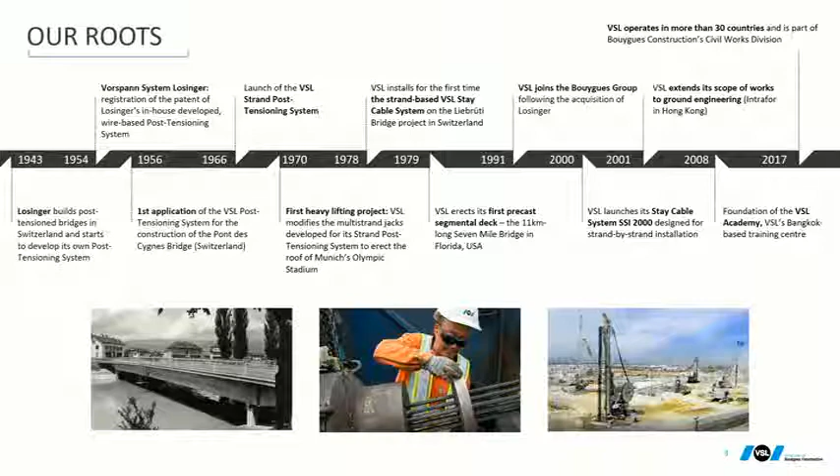A bit of history. VSL has been built as a spin-off from Losinger. Losinger is a Swiss company, known worldwide at that time for construction. VSL, meaning Vorspann System Losinger, has been created around a patent of how to anchor wires to an anchor head and transfer this force to a piece of concrete, basically. We call it post-tensioning, eventually.

VSL has been developing the wedge for this 7-wire strand. And from this concept, has developed post-tensioning, stay cable, heavy lifting, and other applications making use of strand and anchor head.

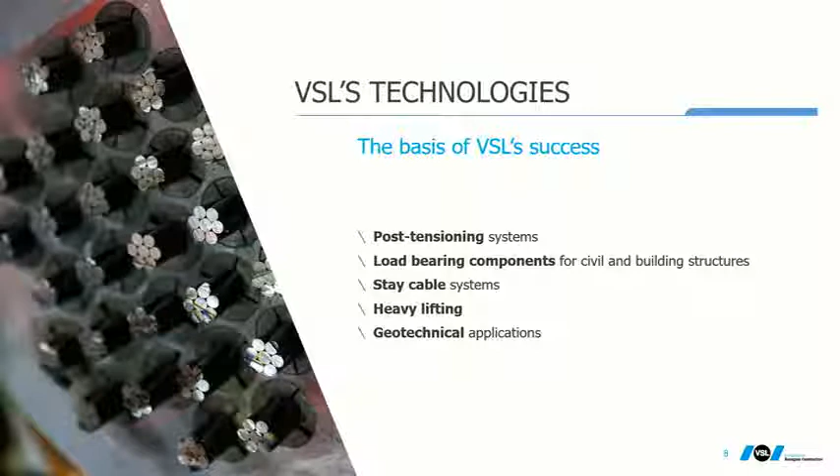Bridge construction, something we have been aware of here in this region; we have been quite active there. Foundation, diaphragm walls -- I'll go quickly on all this. Can you tell me if you need more detail on some of these aspects?

Containment structures, and of course, last but not least, repair and retrofit, which is the new challenge of tomorrow: maintaining a huge park of existing structures.

And this over the past 60 years. Many references in many different fields, and a lot of them about bridge construction.

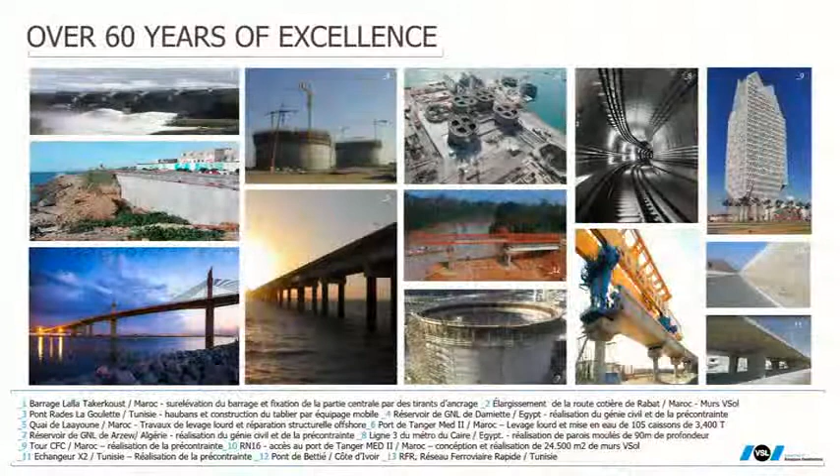So let's now enter into the heart of the topic: stay cable. And just a bit again of history about stay cable. First stay cable bridge, 1978, and since then we have kept developing, eventually with various solutions till now.

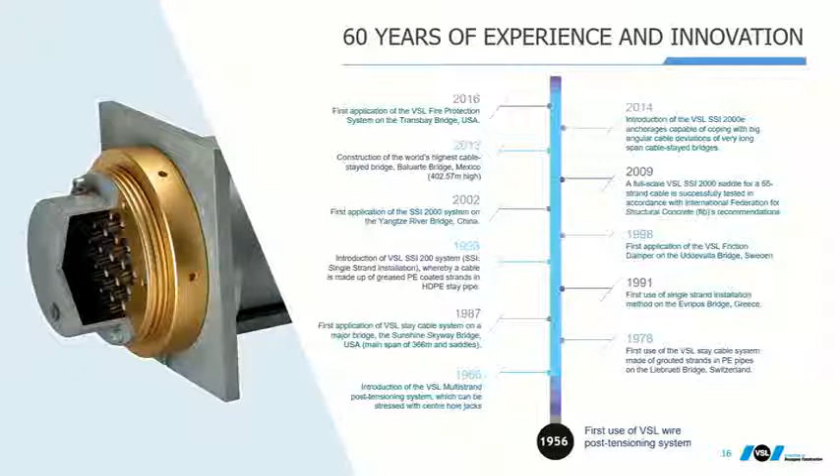So here we are. In terms of stay cable, we're going to look at it from the point of view of components, for the beginning. Stay cable -- everyone knows what it is. It's a cable structure transferring force from one point to the other.

Today, in the perspective of a new recommendation and new code, it's seen as a family of 5 families of components. The first one is the tensile element, the strand, which transfers the load from one point to the other. Second, the anchorage, transferring the force from this one strand to the structure.

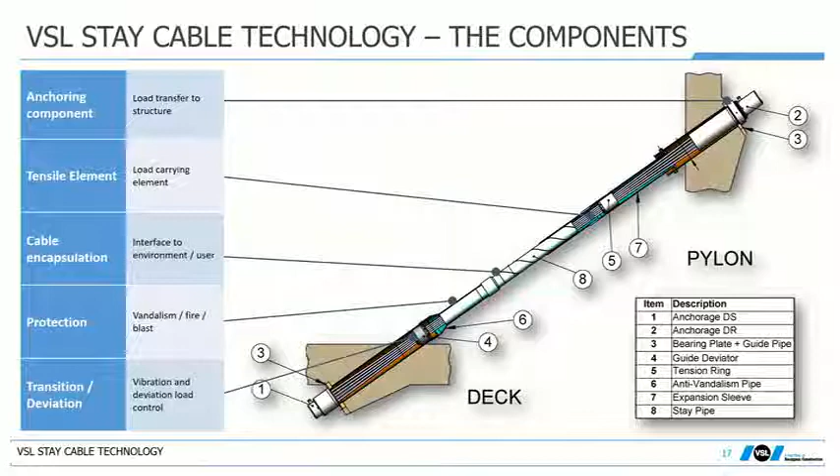So now in terms of application. Today, and especially in the perspective of the fib code, systems have to be modular, meaning that you can have a technology of strand, a technology of anchorage, and apply it on various different applications. And this offers some design opportunities.

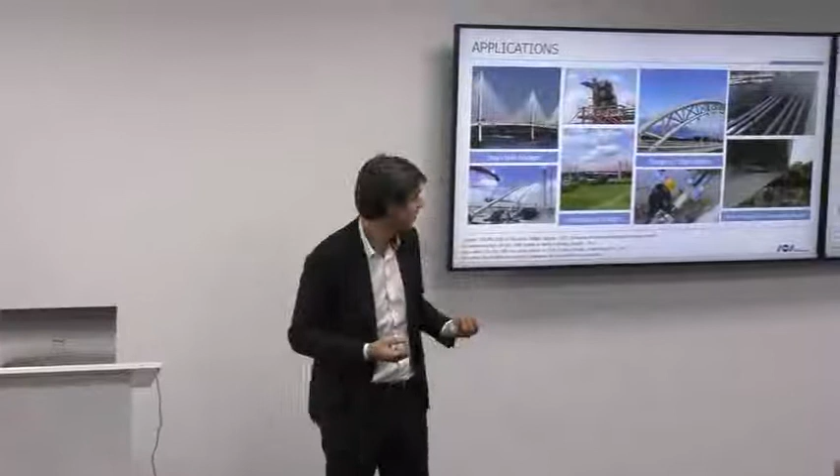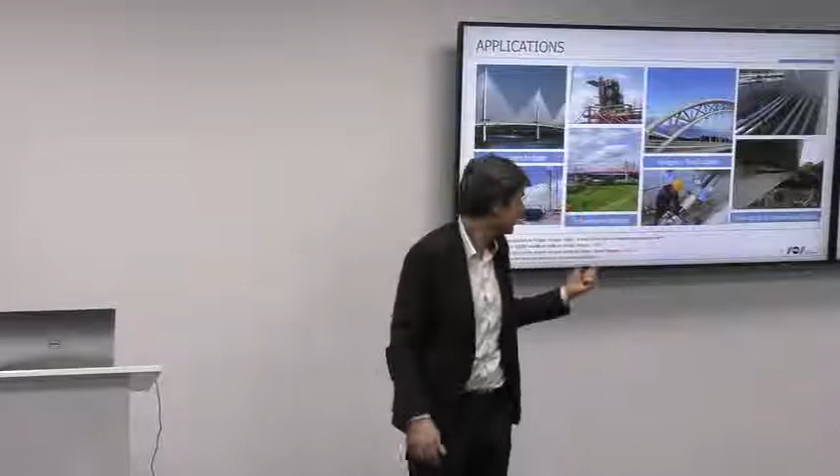Basically, we have a cable. We have 4 different families of applications. We have stay cable bridge, long span structures, long cables. We have what we call extradosed bridge, where the quantity of live load compared to the permanent load is much smaller, permitting some optimization into the behavior of the structure. Then we have hangers, roof cables, vertical. Then at the other extremity of the application range, what we call bowstring cables or tie-downs.

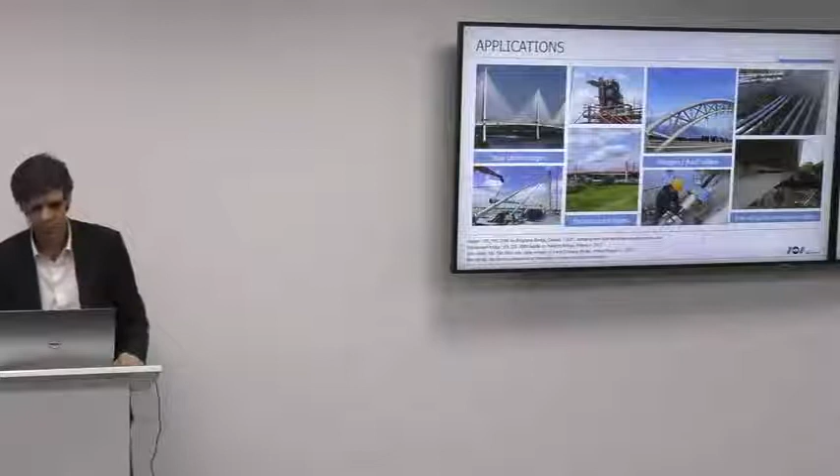And all these different cable applications, we can give a bit of classification. This classification is made from the point of view of the loading, whether this loading induces high fatigue loading or more deviation, or combined. And from this loading, what type of permanent force we accept to have on this cable, or let's say differently, what part of the capacity of the cable we accept to have as a permanent force, and what other part is left to cater for safety.

So if we go with stay cable, we have high fatigue loading, high deviation potential occurring, and therefore we do not occupy more than 50% of the capacity for the permanent load, basically. If we go with extradosed cable, we have a moderate fatigue loading, low deviation, and therefore we can go beyond in terms of permanent force.

Hangers, these depend on the application. We can have hangers experiencing no fatigue loading, and others with high fatigue loading. And therefore, this is a decision of design: what is the maximum force we can have in permanent situation? Bowstring cables usually have very low fatigue, almost no fatigue, no deviation. Tie-downs have low fatigue, but can have extremely high deviation.

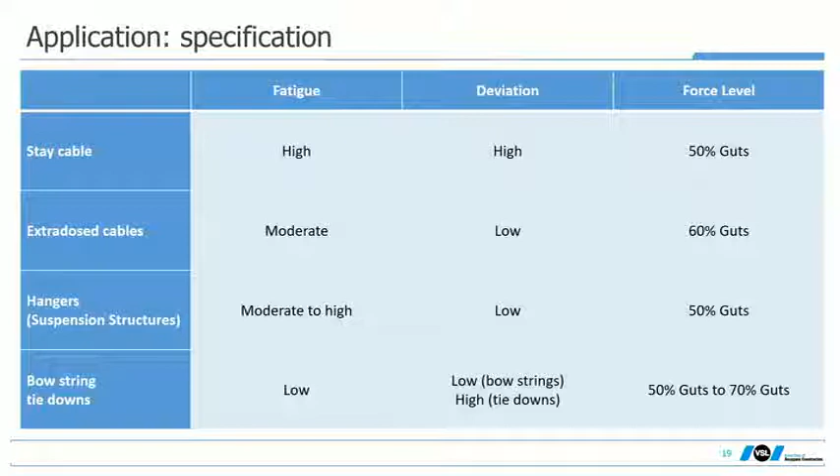Is this the initial load you put on the cable when you construct, or is it the final capacity? Can you only stress till 50% when you put it on? This value usually is what we call the maximum service state. It's a maximum service load, meaning that if you anticipate a high service load on your cable for your permanent situation, you would stress it initially at 30%, for example.

Finishing with tie-downs. Tie-downs are cables used to restrain a deck of a bridge against the abutment. Most bridges elongate with temperature variation, and therefore this cable can experience very big rotations. So you have to judge as a designer what would be the maximum force in this cable in service upon the potential deviation you may have on the tie-downs.

So from this classification, VSL, as a stay cable supplier company, is offering a portfolio of solutions. And what is important with these various types of solutions for each application is that they can be combined together.

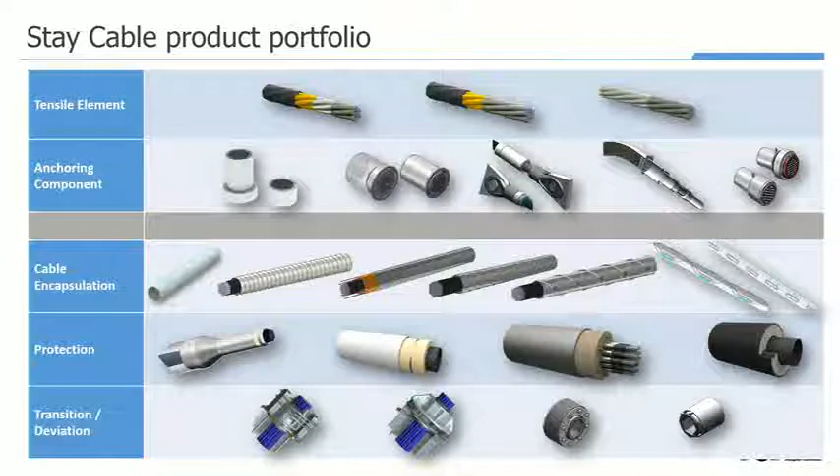Typically, for the tensile element, we have various technologies of strand. These have to address the situation of the structure, basically the exposure to environment, how harsh or not, the type of loading you expect, and very importantly, the normative frame in the area, the design codes. Typically in the USA, galvanization on the strand is not allowed on federal projects, and therefore codes were developed for using this type of strand without zinc. For the rest of the world, you can use zinc, so it makes the technology a bit different.

Why, sorry, why in the US do we have no zinc? No, why are Americans not allowing galvanization?

You want which answer on this one?

I think galvanization is a technology which is extremely polluting. One reason, not the only one, is that the galvanization process is highly polluting.

Polluting, correct, but it's not only this reason. Today, what I know for sure is they are developing a code, a design, or a normative to have zinc into the US as well. But for the moment, because of the heat changing the performance of the material, this is true, but it doesn't mean it doesn't work. When you have a material and you apply a zinc process, you change the characteristic. This is true, and therefore we have different requirements for strand with and without zinc.

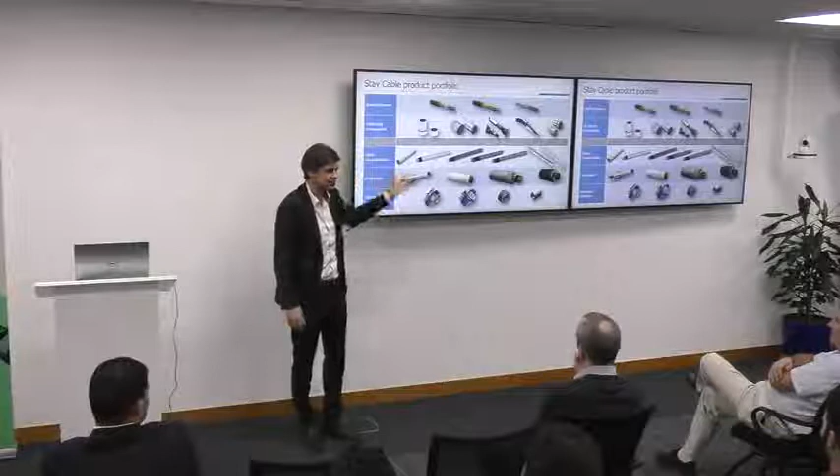Then we have protection, various types: basic protection, fire protection, blast protection, all of these being required or not, depending on the structure. And eventually we finish with the deviation device, which can be dampers, which can be guiding devices, or just nothing, just a compacting element to maintain the compact shape of a cable.

So we go one by one on all this family. Let's start with the main tensile element, coming back to your questions. Today the standard is this strand, which is grade 1860 MPa.

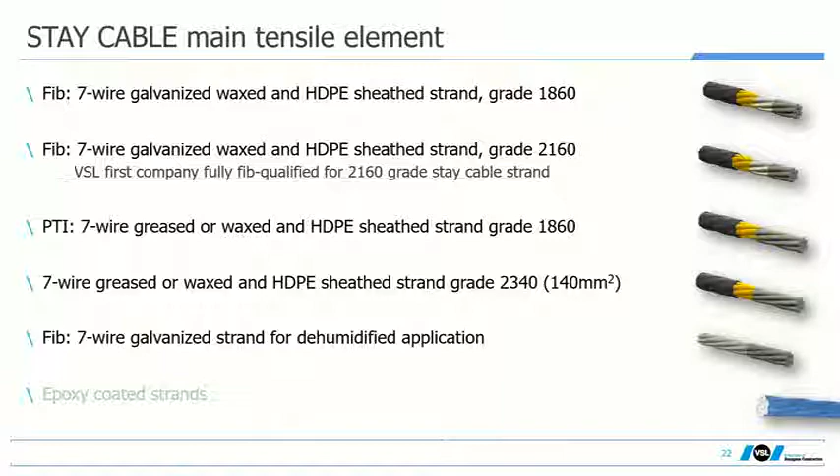This is a new standard which has evolved from the former 1770. Today the strand industry has developed a higher grade, 2160. So the industry of wire is increasing the capacity of strand. And today, of course, VSL is proud to have been fully qualified for this application.

Is there any reduction in the extension for failure? You mean strength? Can I turn your question into, is there any loss in ductility? No, I didn't ask that. I said extension. You mean elastic extension? Yeah, because you have got a certain extension upon which you should not allow any further for the ultimate. So your level is the same. Relaxation? No, extension, not relaxation.

So if you apply a higher grade of strand, you can reach a higher extension. This is true. Whether you have a loss in ductility, whether you fail with a higher extension, today there are strand suppliers capable of reaching a very decent extension within the same limit we observe as a requirement for the 1860.

But I don't know if I understand your question well, whether we have a more brittle material or not. Yes. It's not the case, but it's not either the same chemistry on this strand. There is a small jump between 1770 compared to 1860 to 2160, and there is a change in the chemistry of this material, permitting similar ductility compared to the 1860.

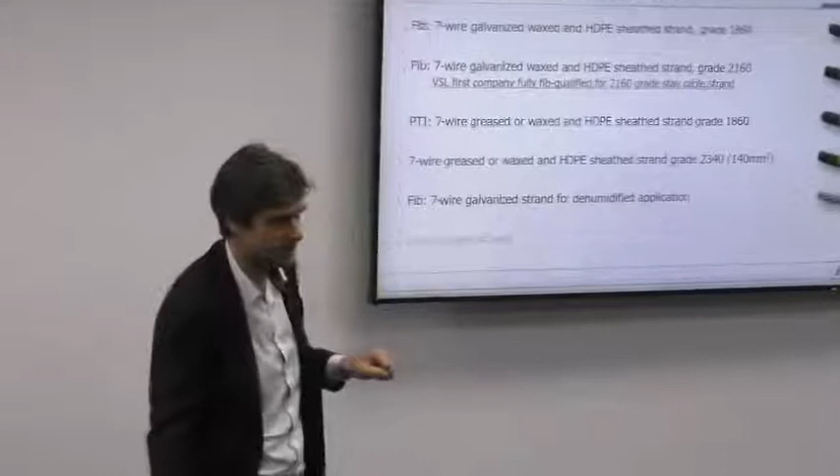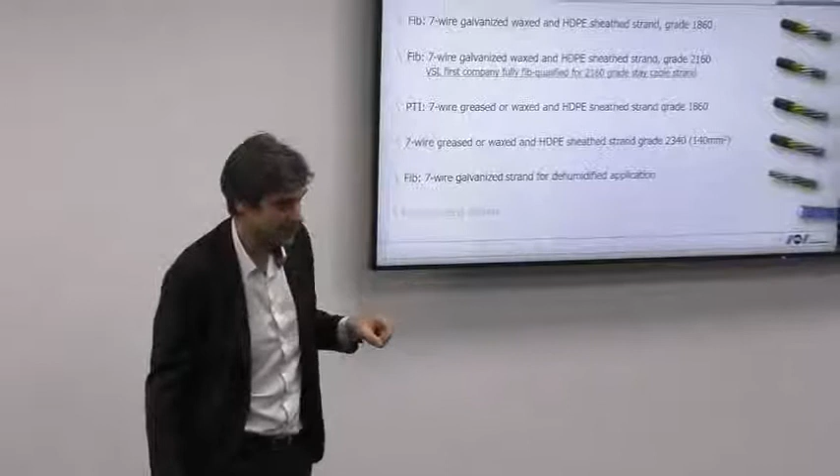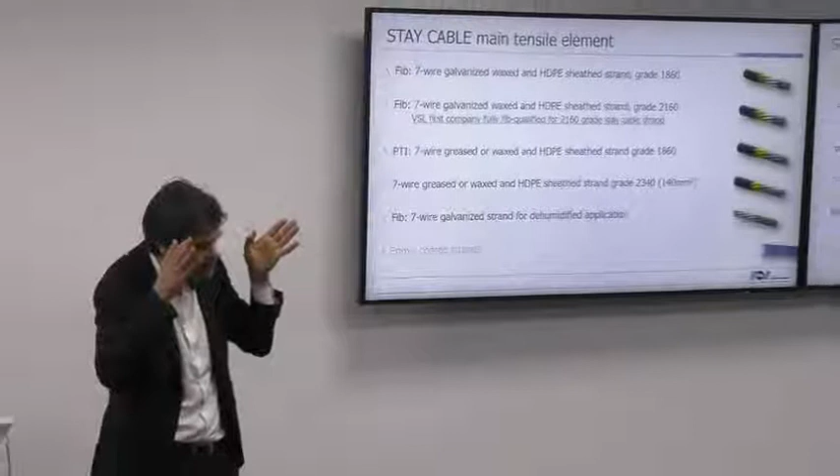Can we optimize the structure by this use of strand? Technically, yes. Economically, not sure, because the cost per Newton of force is higher with that technology of strand. It's different compared to the other technology of strand. So unless you have a clear technical reason to go more compact, this use of high-grade strand might not be optimum.

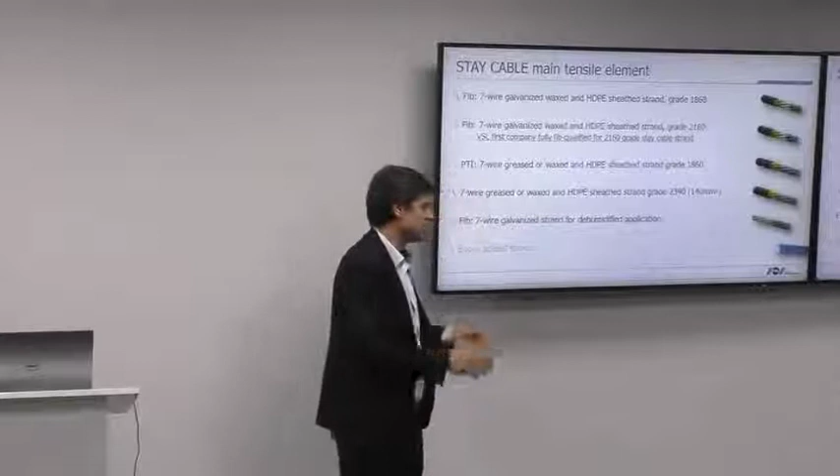How much more expensive, like 20%, 100%? No, not this much. We're talking about a few percent. But this depends on the global cost of the structure. If you introduce all other parameters, for the same quantity of strand with higher force, you can reduce the number of strands and save on labor costs and many other places. But trying to save only on the pure kilogram of material is a waste of time.

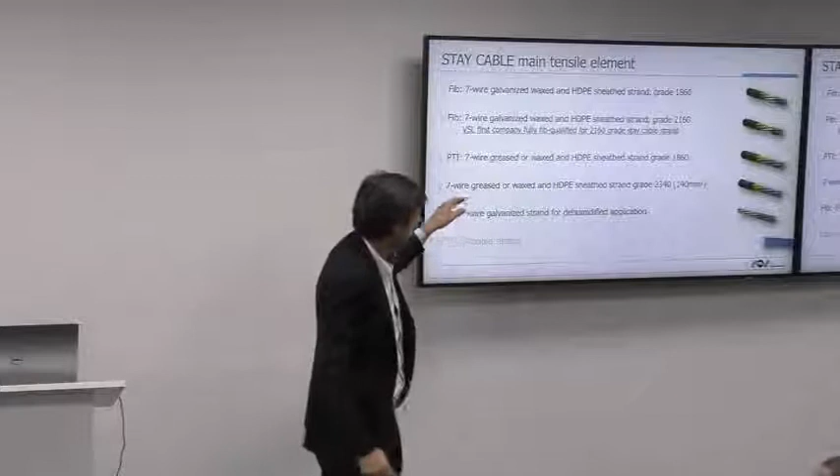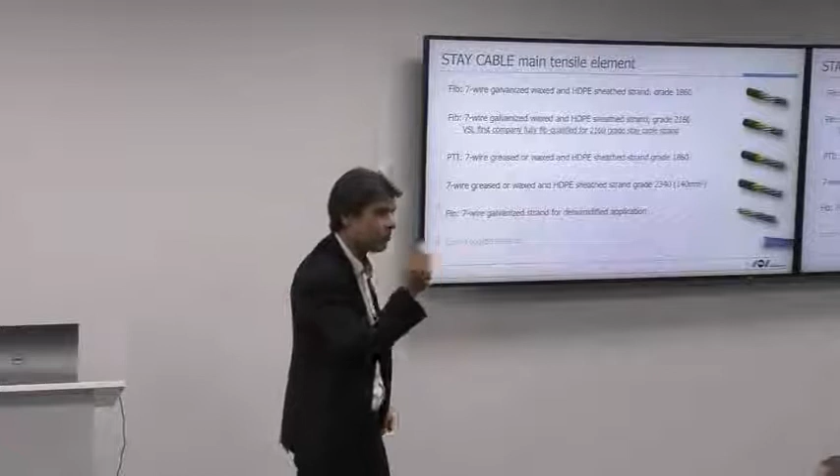This is a strand we call PTI strand, which is recommended in the US, which has no zinc, and therefore has slightly better behavior for some aspects and slightly lower for others. Talking about fretting, for example, it's a bit less. Talking about ductility, it's a bit better due to the no zinc on the strand.

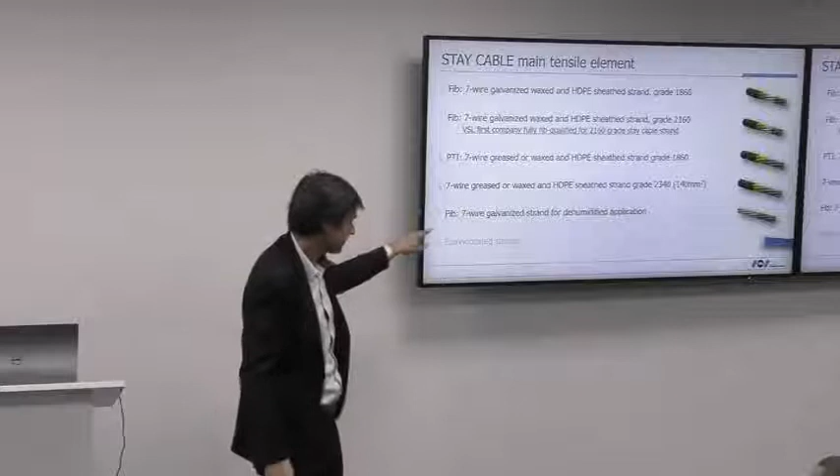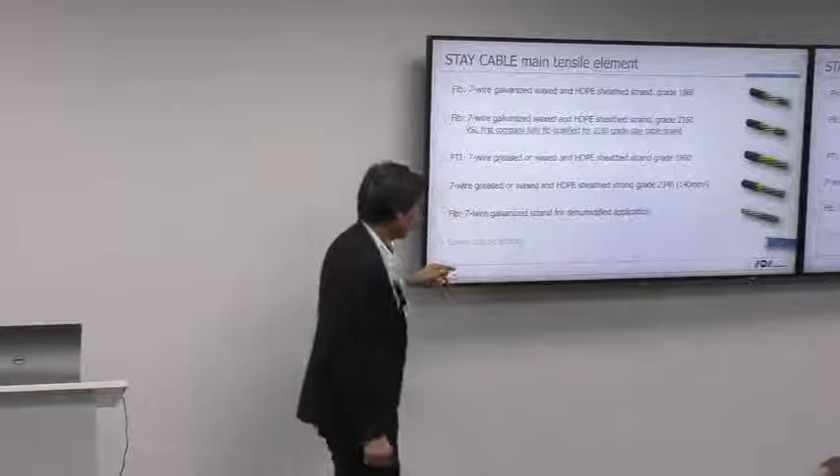VSL is making use, for a specific concept I will show later, of strand without any sheathing and injection. And eventually, we're talking about epoxy-coated strand. VSL has reference experience with this type of strand, but VSL does not recommend the use of that strand.

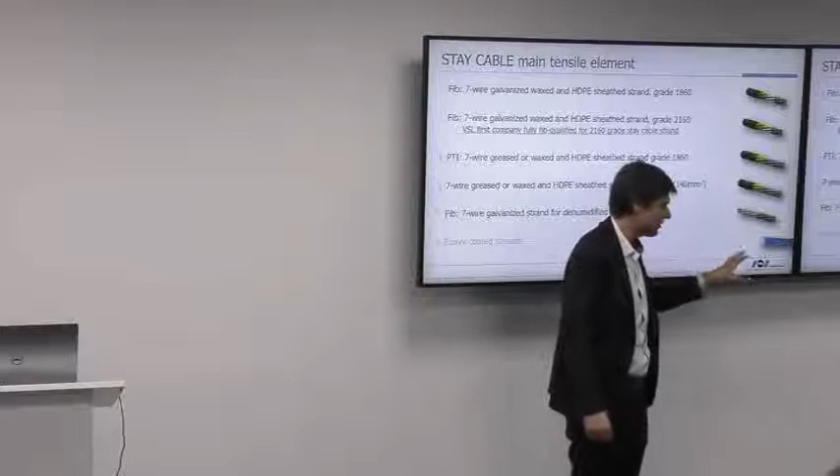Do you have epoxy-coated strands for stays as well? We have experience, but we will never recommend this technology of strand. Maybe we can discuss this. Why do we not recommend this?

Does it crack? Yes, that's correct. It gets cracked, famous on internal strands, but then you have a lot of wedge loss, etc. You have a huge setting of wedge, and you have a huge increase in relaxation.

Today we are relying on this strand because it has very low relaxation. And now we introduce a technology which multiplies the relaxation by more than 2. On top of this, we have a test, and this strand has low redundancy, meaning you do not lose one wire, you lose a complete section.

It's a localized corrosion. Exactly.

So you don't recommend it just for the stay cables or for post-tension? VSL's position, I would say, is to do the best for the structure. And today we have not seen any advantage of using epoxy-coated strand in any application.

Maybe we have overlooked something, maybe we have missed a point somewhere, but for the moment we do not see a technical interest in going with that strand.

Talking about anchoring components or elements, this is basically the standard state-of-the-art technology of anchoring a cable to a structure. Two types of anchorage: one called the dead end, passive end, or fixed end, depending on the vocabulary, and the other called the stressing end or live end. Basically, you attach a cable with these two anchorages and you stress with the active one.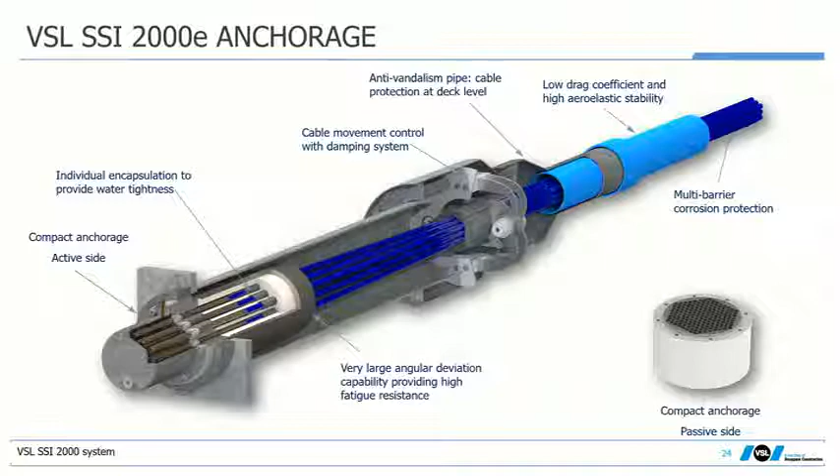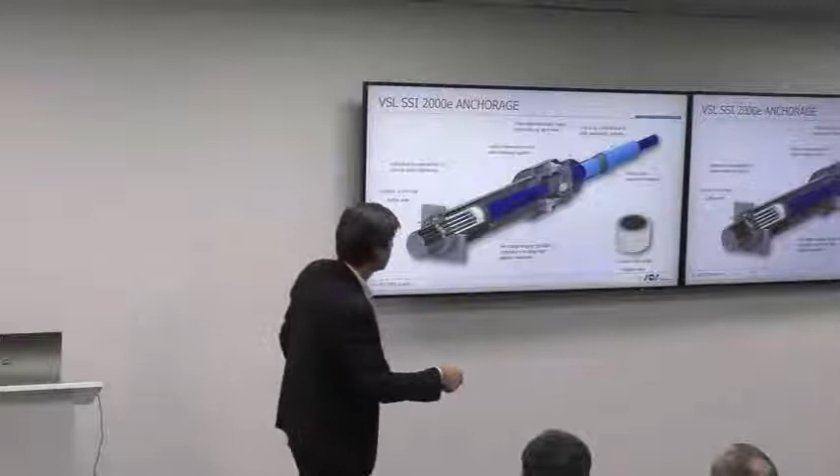You can stress by the passive one if you wish, but you cannot tune the force with the passive one. You tune the force by the active one. Where VSL has been developing lately is to introduce all these components here, on this part, which we call the transition zone of the anchorage.

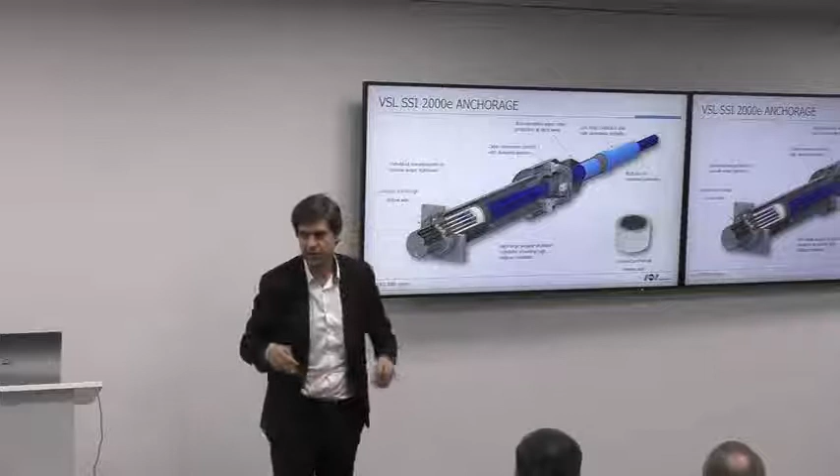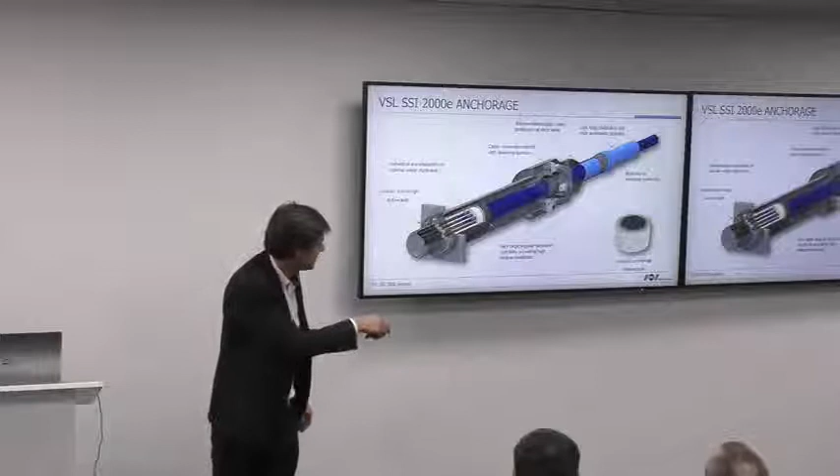For the passive anchorage, they are integrated into the anchor head. The anchor head is this piece of steel where you have the wedge transferring the force of each strand to the anchor head. So we have all these parts here in this transition zone, introduced and concentrated inside this anchor block.

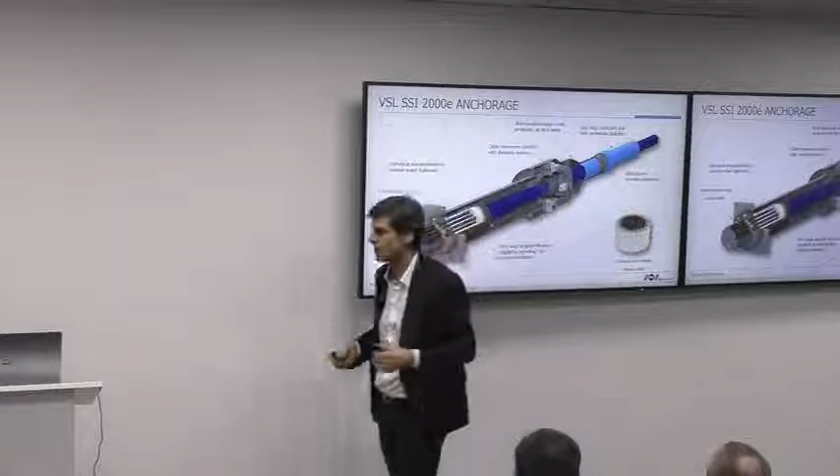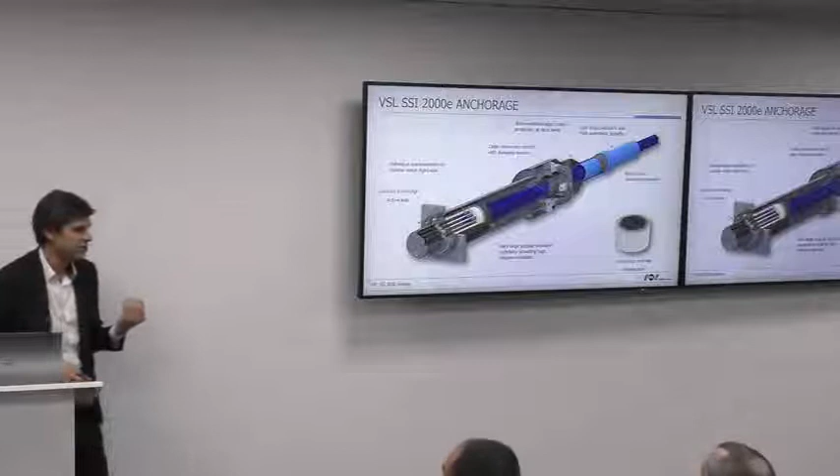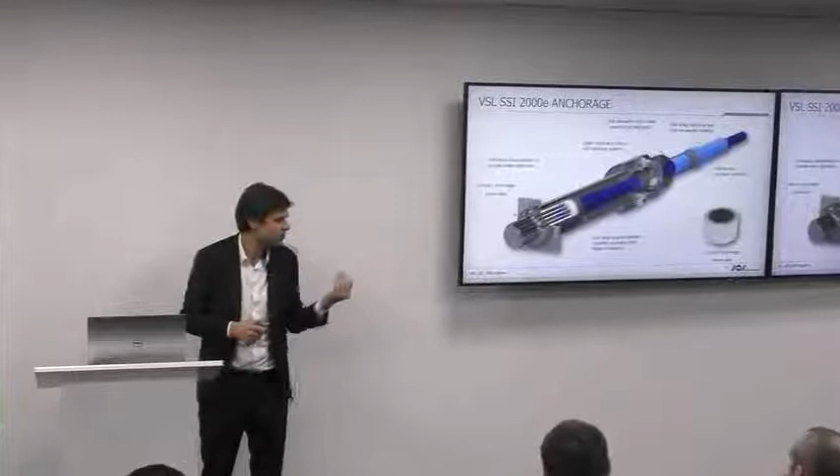This is kept for the active side for one reason: from this side you have to stress or tune the force of the cable. So there you don't know where the sheathing of the strand stops, and the sheathing has to stop inside the anchor block. So we have an extension required to absorb this position of the sheathing stopping inside the anchor head, and to make sure the system remains tight during service and installation.

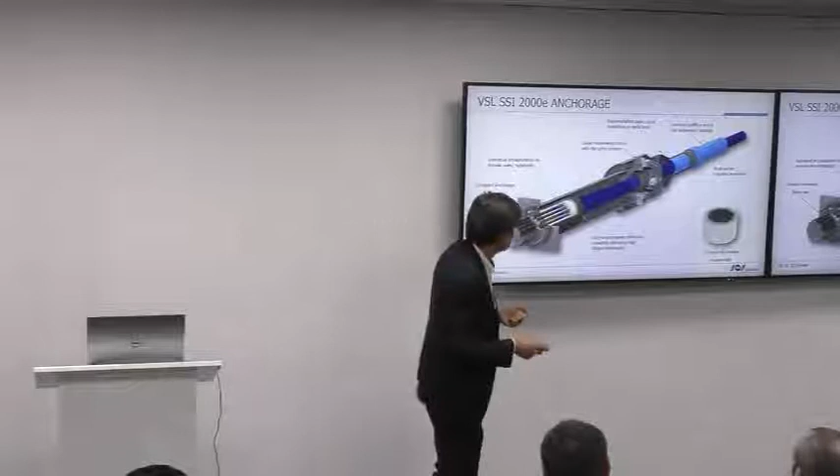Do you have any question on this?

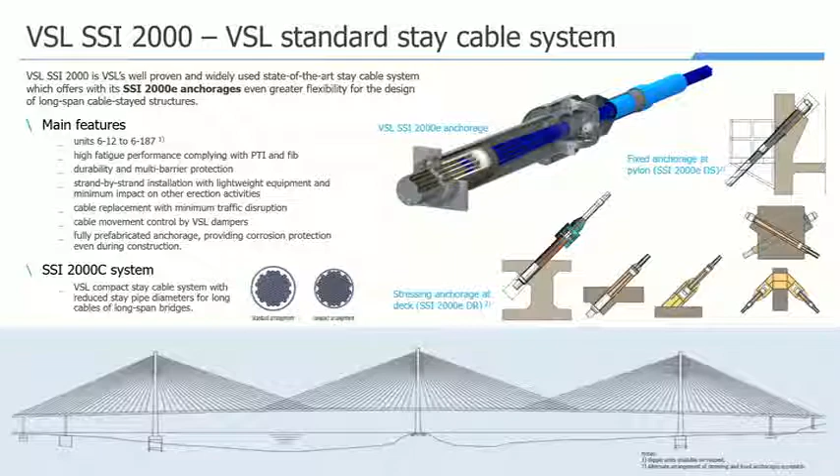This anchoring system can be implemented into a structure, and there are a lot of different possibilities to do so. At the bottom, for example, it can go inside a box girder, below a box girder, above the deck through a steel structure. It can be attached to a tower through steel structures, or through the tower, or inside the tower. Everything is modular, and it's about design possibilities, how to connect it.

Is there a minimum space required if it's inside the box girder for your jack? Yes, absolutely, for the jack. But is it a VSL proprietary jack for the system? Correct. So what is the minimum space? We can tell you it's 1 meter behind the head, for example, but then we can negotiate a bit on this one.

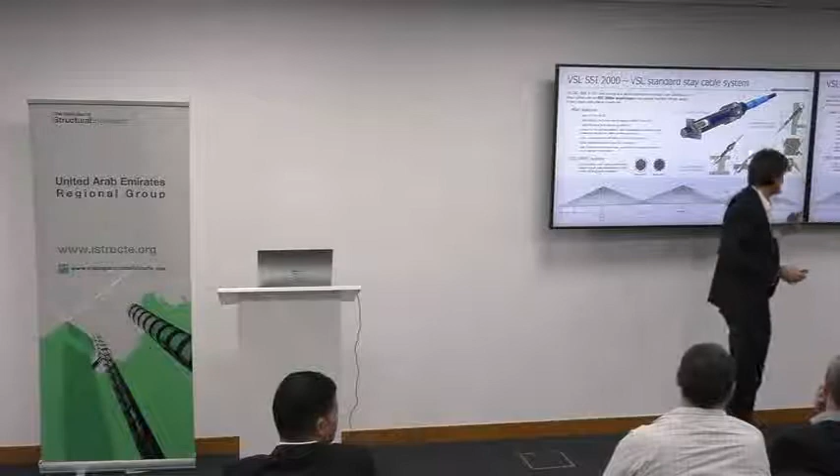For this one, we can work with much more smaller space on the passive side. On the active side, we can as well reduce the space. It's a detailing exercise. We just have to make sure we can do the operation we're supposed to do, and from there we define what would be the minimum requirement space.

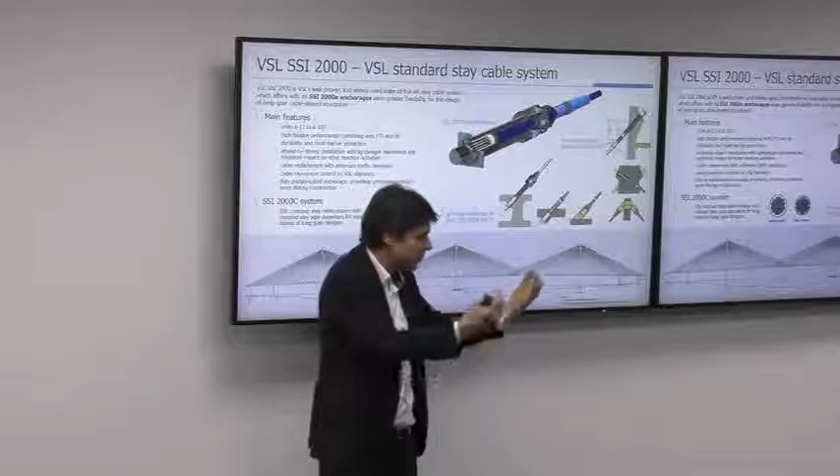It's a good question. Are you using single strand jacks? Absolutely, yes. Sequences become really a headache, yes? Not necessarily. How many cables, strands do you have in one cable? We go from 12, or 7 or 3, to 180 something 7.

It's a repetitive exercise, it requires a bit of concentration. And how long would it take to put the forces in one of those big number anchors? Depending on the stay cable, because you have to thread the strand through, erect the strand, connect the strand, thread the strand. No, just pulling it.

Just pulling it, it depends on the length. Jacking itself on its own is 30 seconds. But then you have all the process behind it, threading the strand through. I was just checking, because you said you have 170 or 180 strands. Yes, so each strand is 30 seconds.

Yes, well, only for stressing. That's where the stressing comes at the end of the installation. But then you have followed a sequence, so you have to install the strand from top to bottom and stress it, then move on to the next strand, making sure they are not entangled in between.

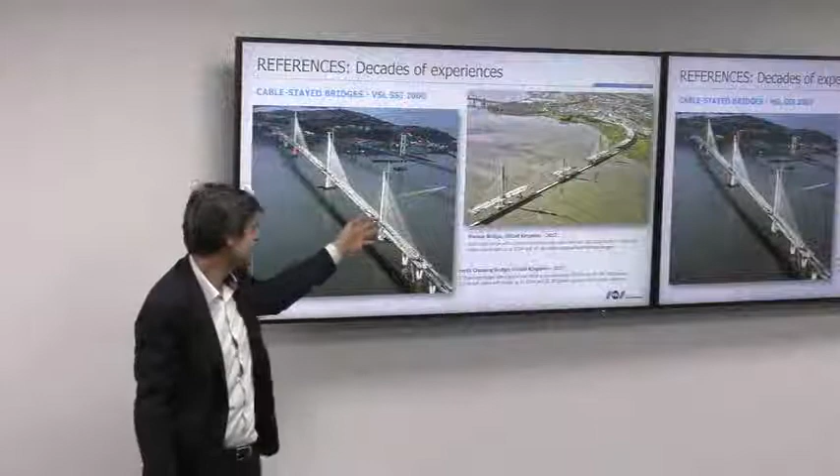So here is an example of application of this type of cable technology. You can see cables ranging from, let's say, 50 meters to 400 meters long. Bear in mind, at 400 meters long, erecting the strand takes a bit of time as well. When you have a 100-strand unit, 400 meters long, it takes a bit of time. We're talking about 2 days, 2 days and a half.

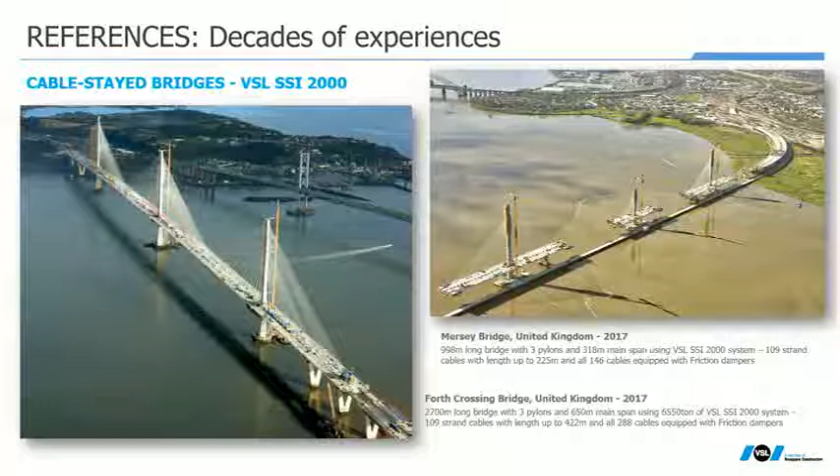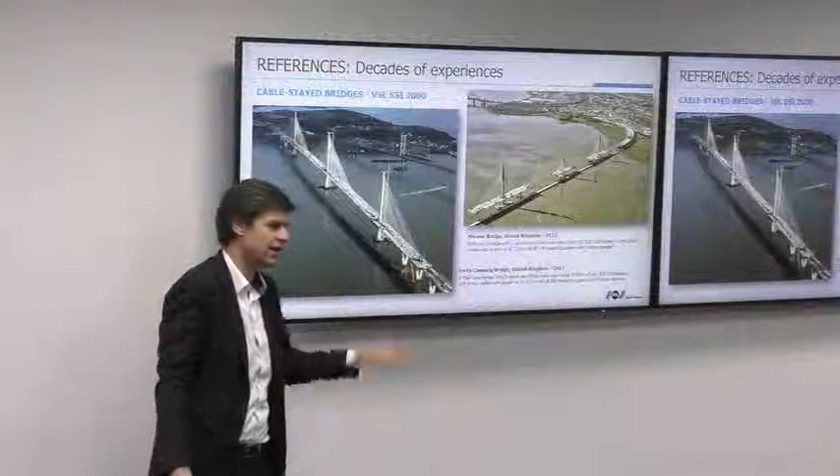It depends. But coming back to this system and increasing the force again, you just multiply the 30 seconds by the number of strands, and you end up with something like 15 minutes, 30 minutes, 1 hour, 2 hours.

Just out of question, you eventually have to give the bridge to somebody. Is it going to be a level submission or force submission? You're checking the forces that the bridge should be at a certain level, at a certain time, certain temperature. This is, let's call it, a discussion with the designer, what is relevant as a parameter.

What's very important is that a stay cable is like a structural element. As a designer, we cannot ask a stay cable to be at the same time at that force and that elongation, because they depend on each other based on how the structure behaves. Either you call for the force, you want that exact force, and consequently you get this elongation as a consequence of how the structure has behaved.

No, I was talking about the deck, because the deck should be horizontal at a certain time. Exactly, the deck should be at a given position, let's call it the road design line. But if you ask for a force to be there based on your model as a designer, and this force is such that after stressing the deck is a bit above or a bit below, it's not the consequence of the cable itself, it's the whole structure behaving.

What happens most of the time, especially in composite bridges, is that the stiffness of the deck... can I just say something here? Yes, please. Because most of the people here are building designers. Okay, and they say this is up to the contractor to do it. They don't know that bridge designers go through that to come up with all the balancing force, go through the sequences. That's what I want you to say, because most people here are building designers. How many bridge designers are here? So you understand that part, yes? Thank you, thank you very much.

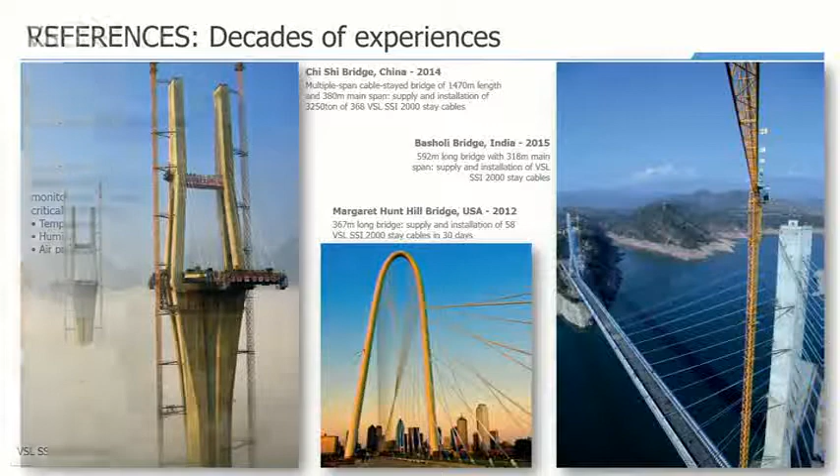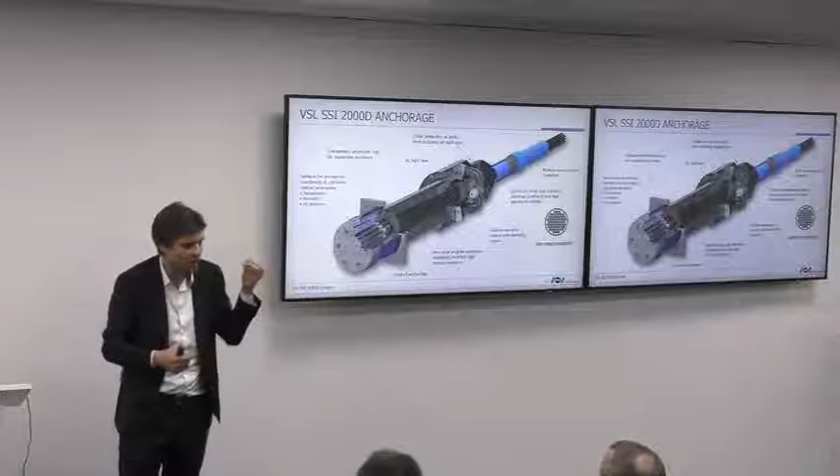This is a development that VSL started about 15 to 20 years ago. We call it the dehumidified system. We depart completely from the requirement we have today, or the recommendation, which calls for strand with wax injection and sheathing, a lot of petrol-based material inside. We replace this passive corrosion protection with an active corrosion protection.

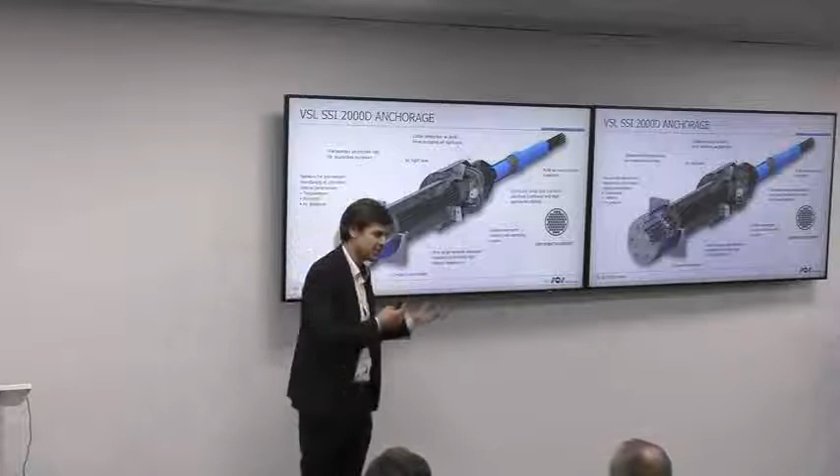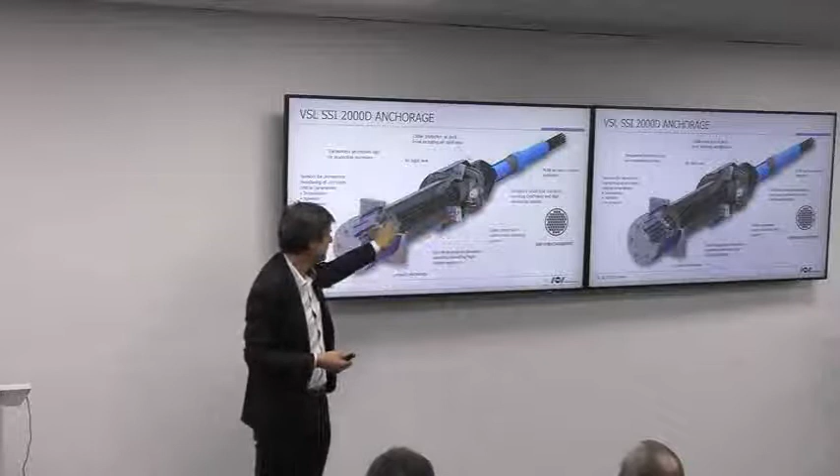How it works is the stay cable system, or the steel main tensile element, including the anchor head, is in a fully tight encapsulation, and the air inside this encapsulation is dehumidified. The water is removed from that air.

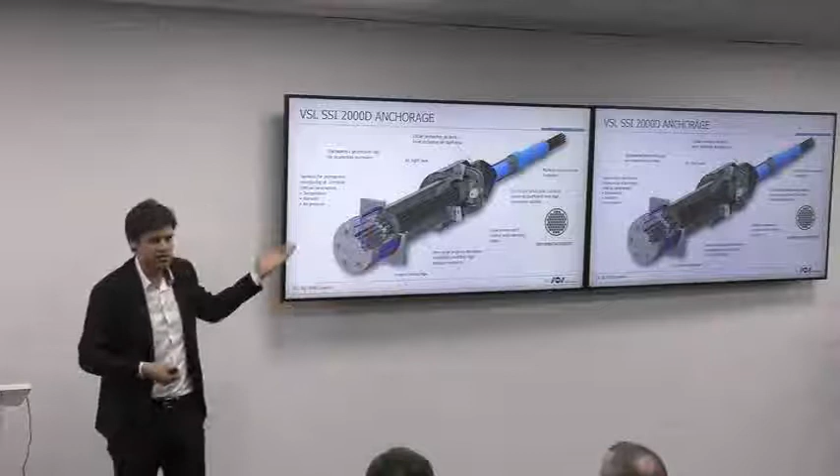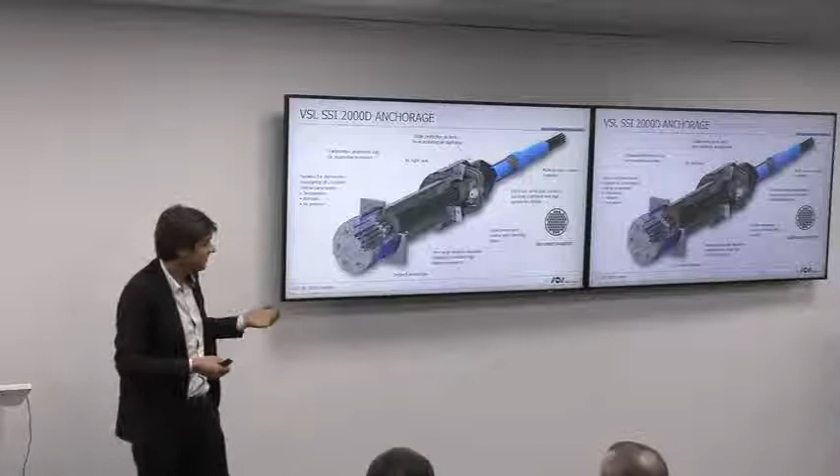This technology is today well spread for protecting against corrosion, the deck structure, for example, or box girders in steel. And it works extremely efficiently for cables. Today we have a catenary cable of a suspended bridge making use of this similar type of technology for corrosion protection.

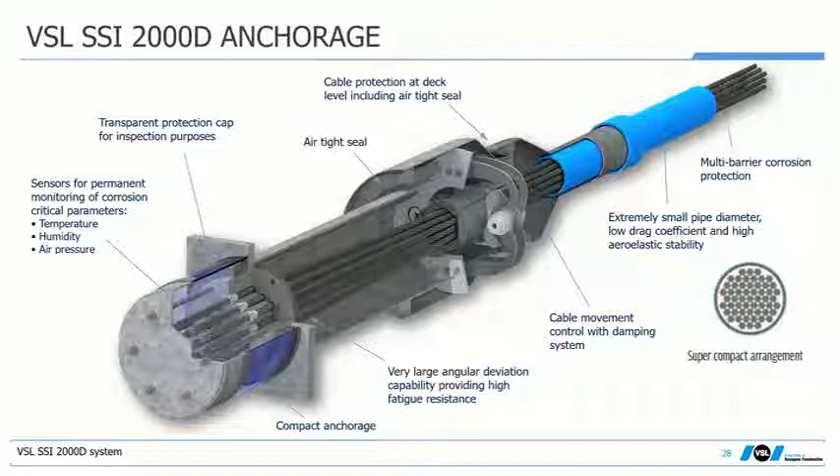VSL has piloted this solution, and today we will try this solution, quite disruptive, which is far away from recommendation, in a project in Hong Kong. Why Hong Kong? Because it's very humid and hot, so very aggressive for corrosion, and therefore we have the best field situation for testing the technology.

The advantage of this technology is because we have removed all this material, we can make the stay cable much more compact, and we can combine this together with an existing dehumidification plant working for the deck, for example, as a box girder.

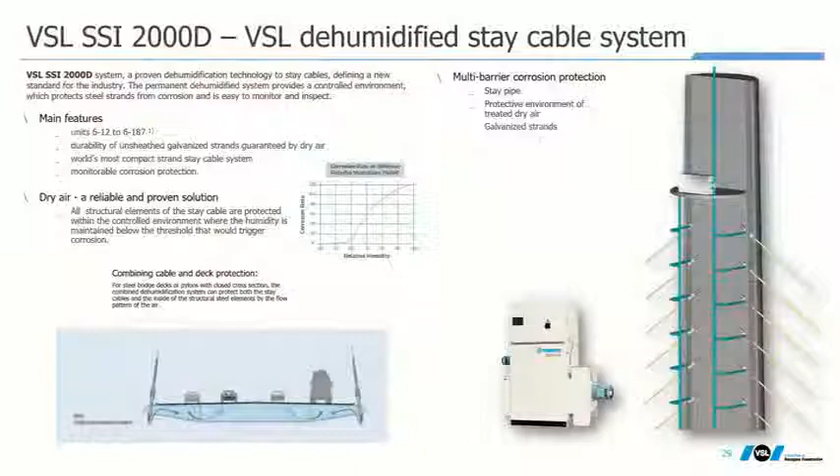So is it a continuous process, dehumidification, or is it done at some intervals periodically?

If you see that graphic here, this is basically the corrosion rates according to humidity. What you find out is with a relative humidity of 60% and below, you have almost no corrosion. It picks up quickly, very fast afterwards, but below 60%, no corrosion happens. All dehumidification plants usually work at 40%.

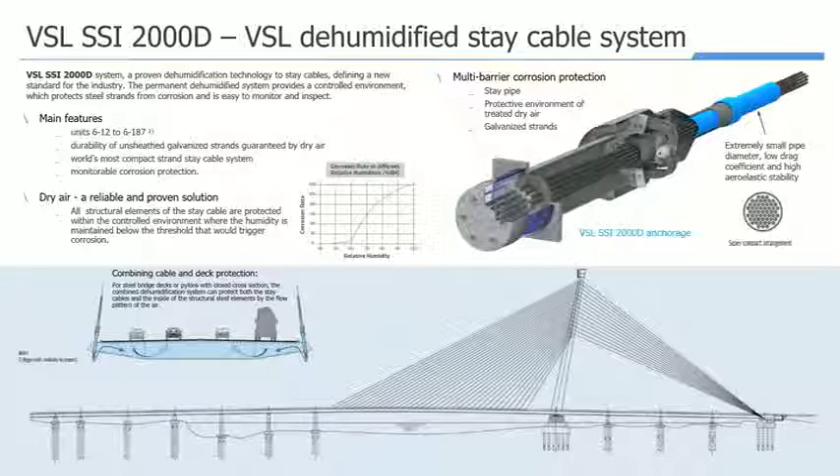So the idea basically is to have a closed loop of dehumidification. This is the principle applied to the Hong Kong project, for example. You keep re-treating this air, and your machine is just there to compensate for leakage. As soon as you have leakage, you have to refeed with dry air, so you only dry the piece of air you add on top in this circuit.

At the end of the day, if your system is perfectly tight, the machine works for the first two weeks and then it's finished. If your system has leakage, it keeps working a little bit. But we are very far away, in terms of electrical consumption, from the manufacturing process of the strand itself with the sheeting and the wax and so on. So there you have a global optimization, especially in terms of energy, and today it's quite fashionable to talk about energy saving.

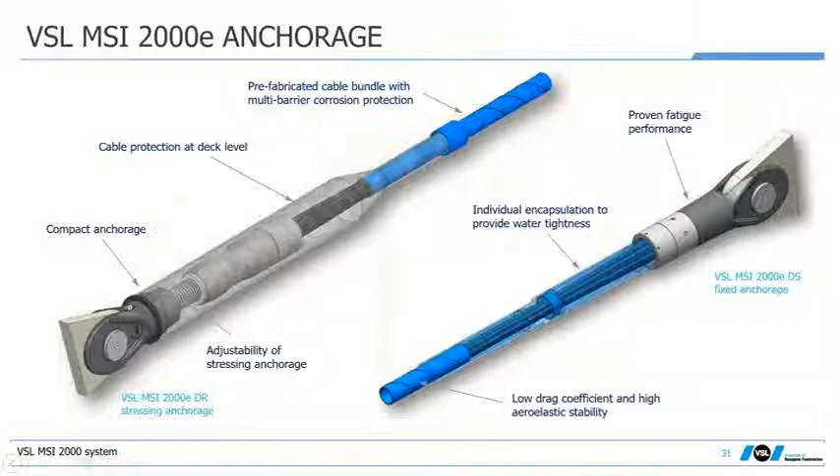So if we move on to other stay cable technology, clevises—I think there is a project in Dubai making use of this type of solution—where VSL has been developing a clevis stay cable system which has similar performance to a heavy-duty stay cable system, so as not to reduce the capability of the system by having a clevis.

The testing regime of this solution is similar to the other one, which is PTI and fib 30. There we have, again, a passive end and an active end, and the force is tuned by threading a rod into this socket using a jacking system.

The system is for heavy-duty application. We're talking about a small number of strands, so let's say light stay cable, but in terms of fatigue loading, the objective is to reach the same capacity as the conventional system with the classical 2 million cycle test, 200 megapascals stress range, and so on, and dynamic deviation of the cable.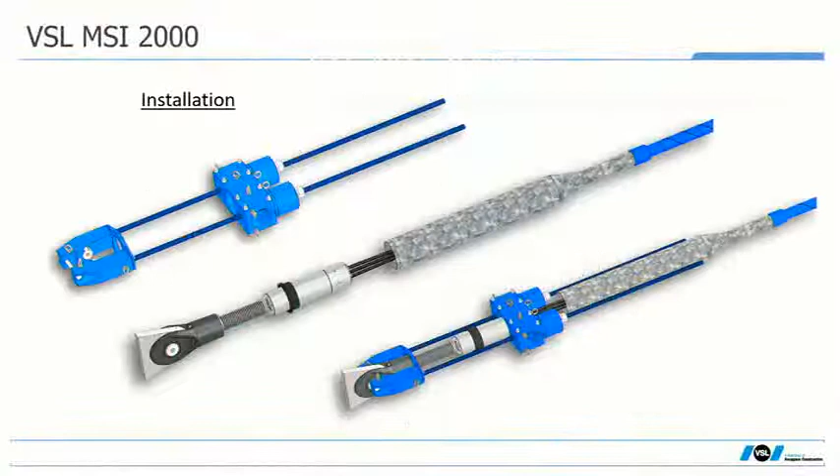It comes with stressing equipment and, of course, application mostly on arches. This is where we have most reference for this type of technology, or roof cables, for example.

The important thing is since we are using exactly the same termination technology with wedge and 7-wire sheathed strand, you can combine multiple components. You can apply, for example, a clevis together with an anchor head. You can interchange components—it's modular.

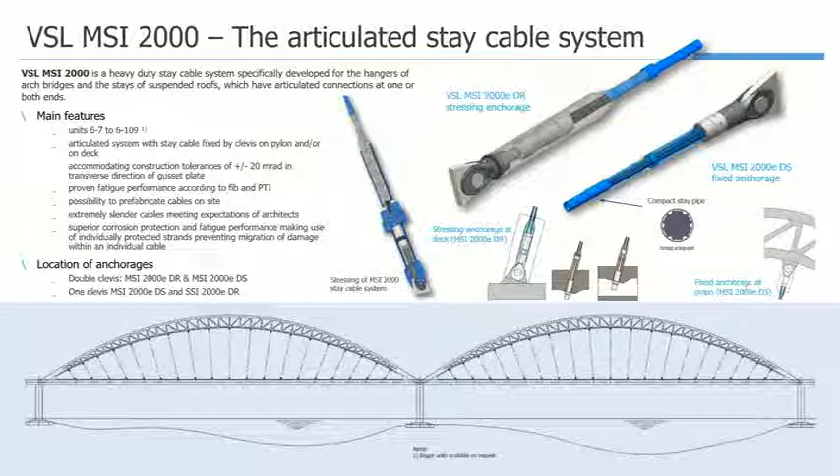You can, for example, if I come back here, attach a clevis on top, and at the bottom have a stressing head like this. This is for roof application.

Now we talk about saddle. The saddle system has been an extremely successful development of VSL. Saddle is the original...